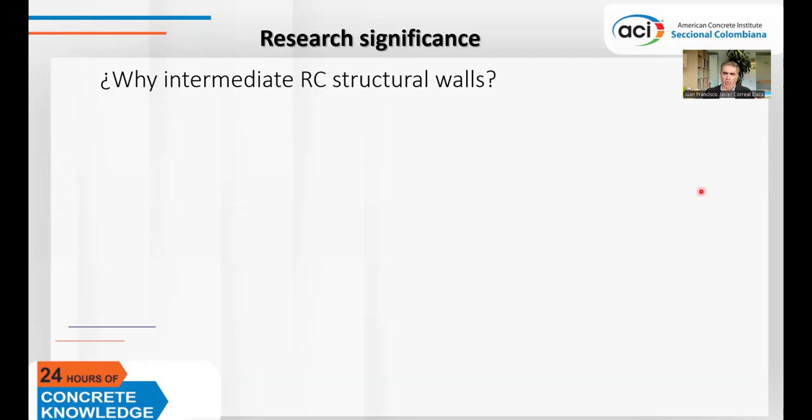We could design using the special reinforced concrete specifications for this kind of system in intermediate seismic hazard zones. But based on a study by Professor Luis Enrique Garcia in 1995, it would increase the cost of the building by close to 20%.

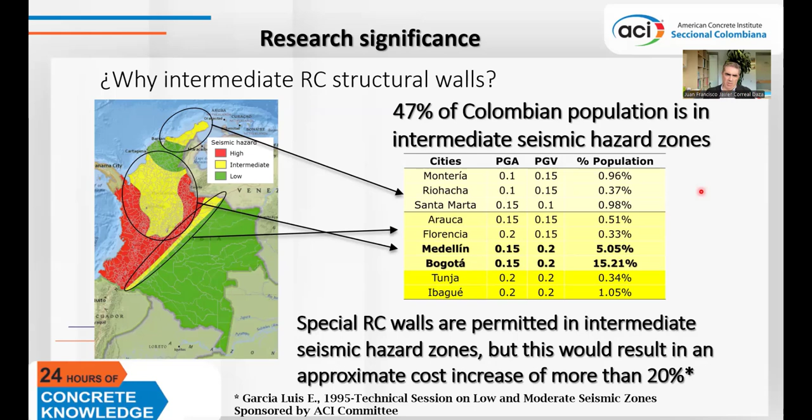In addition, based on national statistics, this kind of wall system has been used very often and successfully in Colombia. Actually, based on statistics from last year, 2023, 50% of residential buildings have been built with this kind of system.

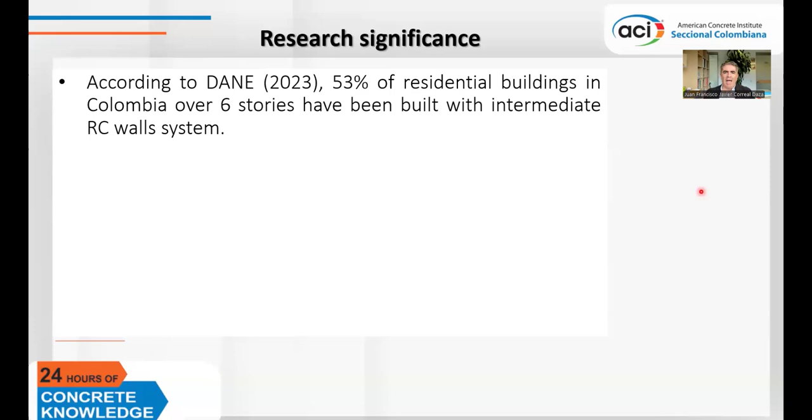We have our Colombian code that has specifications for this kind of intermediate structural wall, and it's probably the only design code in the world that has this kind of specification. We have been using these specifications for probably the last 20 years.

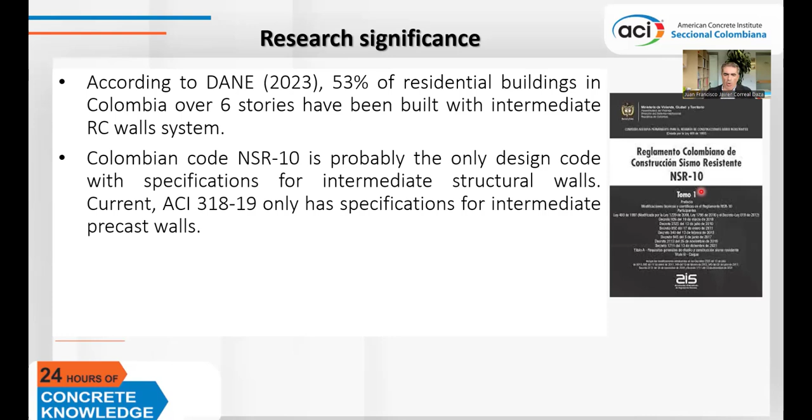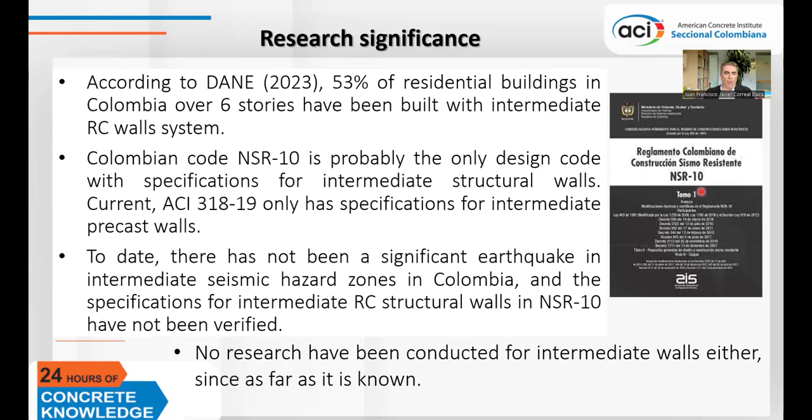The ACI 318 actually only has specifications for intermediate precast walls. To date, there has not been a significant earthquake in an intermediate hazard zone in Colombia, and the specifications for intermediate reinforced structural walls based on the Colombian code have not been verified or tested. No research has been conducted for intermediate walls either.

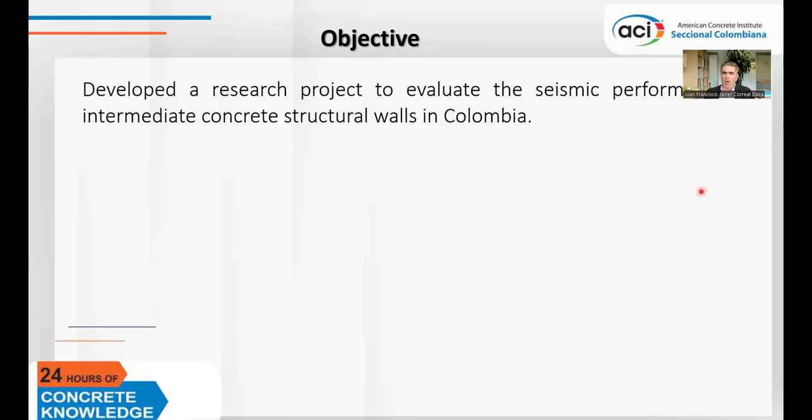Therefore, we decided to do a research project with the objective of evaluating the seismic performance of intermediate concrete structural walls. To do that, Universidad de los Andes joined efforts with an association of all the main construction companies, and also made an agreement with a very important structural company in Colombia, P&D, that was in charge of designing all the archetype buildings I'm going to show you later.

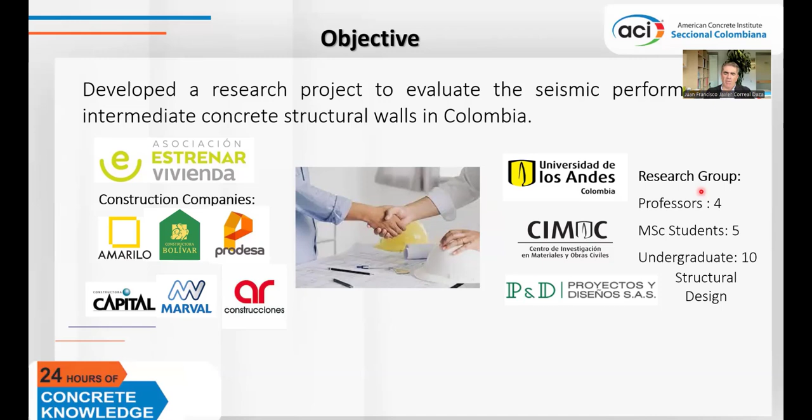The whole project took us about 3 years, which involved full-scale testing of walls and the application of FEMA P695. Why did we use FEMA P695? Because the methodology provides a rational basis for determining building system performance factors. If applied properly, it results in equivalent safety against collapse in an earthquake, comparable to the inherent safety against collapse intended by current seismic codes.

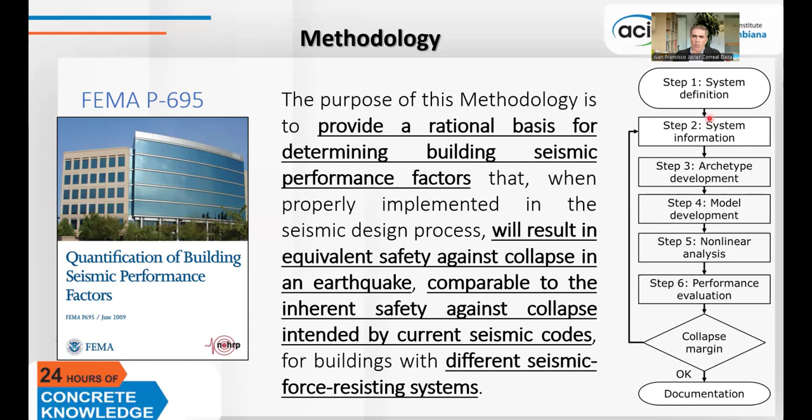This methodology allows the use of different seismic force resisting systems, such as what we have in Colombia with intermediate reinforced concrete walls. The methodology has 6 steps that I'm going to show you through this presentation, applied to our study. The first step is to define the system. Of course, the system is already defined by the Colombian code, which has intermediate structural wall specifications based on the special structural walls of ACI 318 2008.

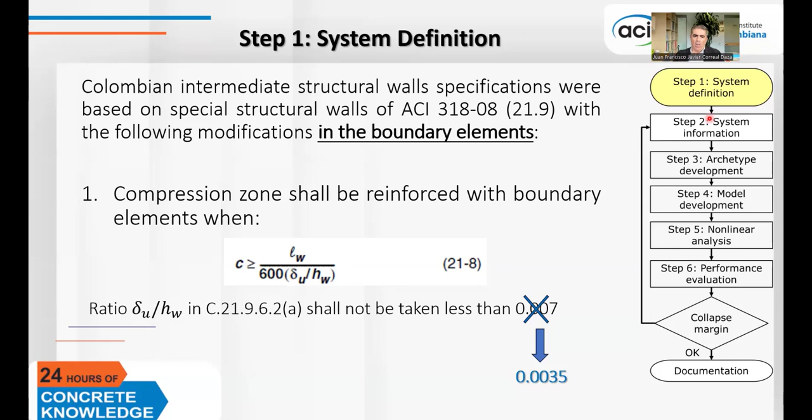But there are some modifications, especially in the boundary elements. The first modification was related to the compression zone that should be reinforced with boundary elements when C, the equation C, is higher than the equation shown. That equation has a ratio that should not be taken less than 0.007. In order to comply with the intermediate seismic hazard zone, we lowered the ratio to 0.0035.

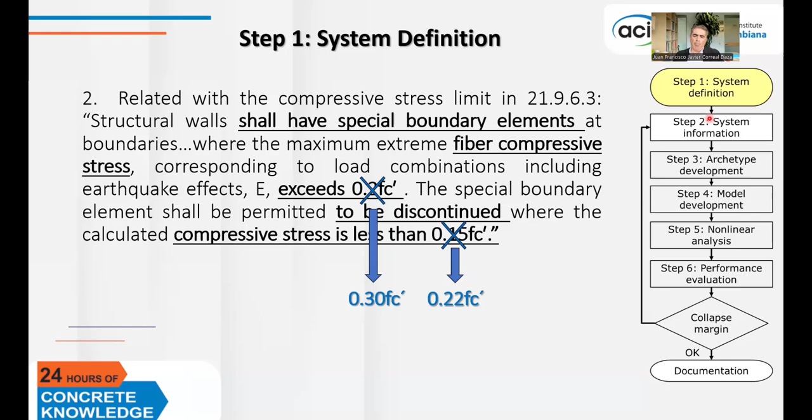The second change in our Colombian code was related to the compressive stress limit. The specifications say you have to use special boundary elements when the compression stress exceeds 0.2 f prime sub c. The specifications also tell you when you can discontinue the special boundary elements, which is when the compression stress is less than 0.15 f prime sub c. In order to comply with the intermediate seismic hazard zone, we increased those stresses to 0.3 f prime sub c and 0.22 f prime sub c.

The third change was related to the transverse reinforcements for boundary elements, which should satisfy spacings for intermediate columns instead of special columns as mentioned in ACI 318. We have a spacing limit that need not be taken less than 100 millimeters. Here I'll show you the spacing that comes from intermediate columns, which should not exceed the smallest of A through D, as you see on the screen.

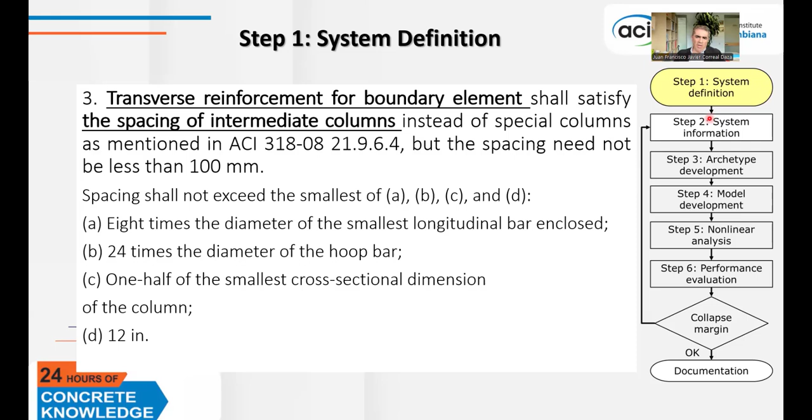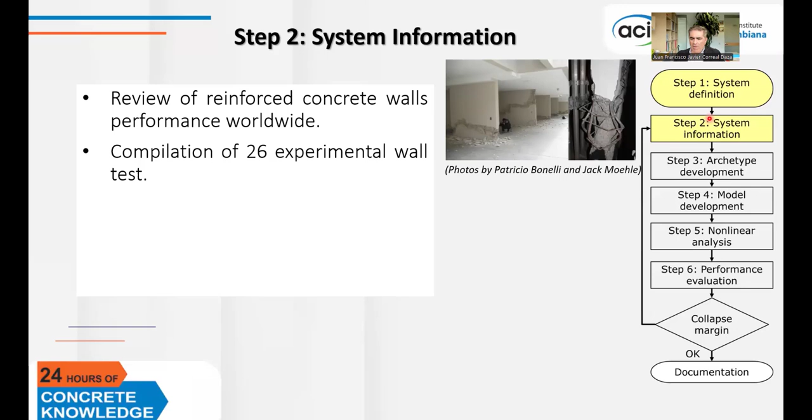In addition to that, we reviewed reinforced concrete wall performance worldwide, mainly the behavior of this kind of system in the Chile earthquake in 2010 and the New Zealand earthquake in 2011. We also did a compilation of 26 experimental wall tests, mainly from reviewing different papers and proceedings, like this one by Professor John Wallace and Jack Moehle.

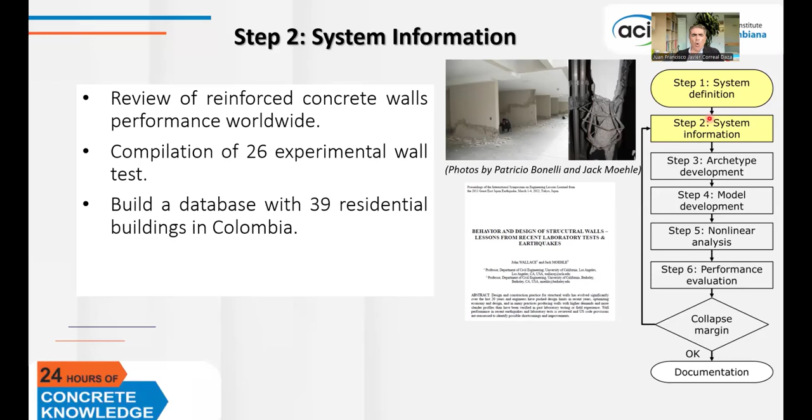We also built a database with 39 residential buildings in Colombia, and we reviewed the most common types of walls, like you see here, the plan view of 2 different buildings. You see different wall configurations, like L-shaped, I-shaped, rectangular or linear walls, and depending on the height of the building, you also end up having boundary elements.

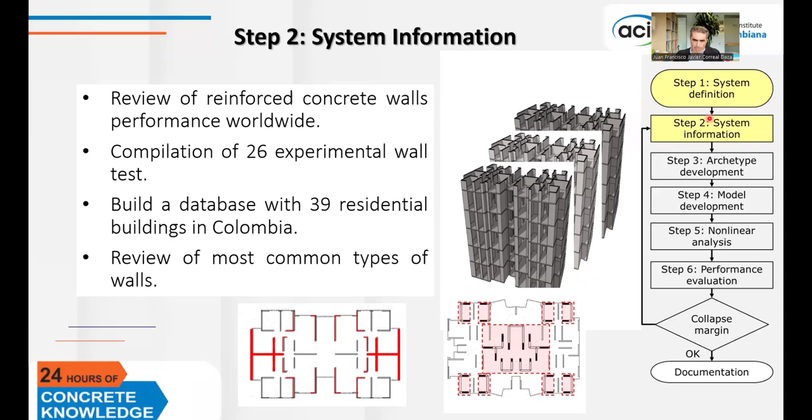Then we go to step number 3 of the methodology, the archetype development. In order to do that, we have a total of 12 archetype types grouped into 4 groups, all structural systems with intermediate structural walls.

The gravity load was defined as low because it varies between 3% and 6% of the wall axial strength. The intermediate level of seismic hazard was divided into 2 levels, minimum and maximum. For the minimum, once we have these loads defined, we can design 3 archetypes for the first group, which were 5-story, 6-story, and 8-story buildings.

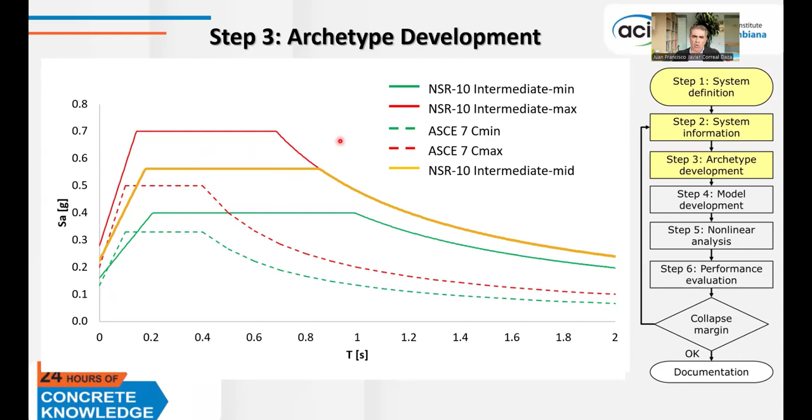In total, 12 archetypes. Just to show you here the design spectrum for the intermediate maximum level, which is the red spectrum, and the green, which corresponds to the intermediate minimum level of hazard. For comparison with ASCE 7, using Seismic Design Category C, which is like the intermediate seismic hazard zone in the US, you see it's in the same range as in Colombia. I also show the intermediate mid-level, which is used to design buildings in Bogota and Medellin, the 2 main cities in Colombia.

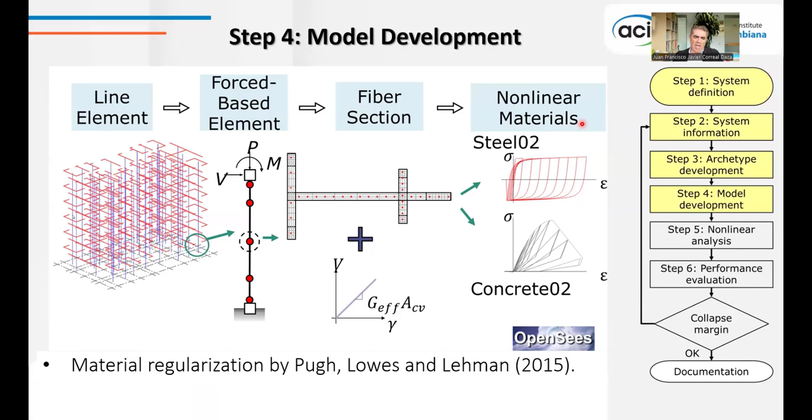Step number 4 was to develop the computer program. We used an OpenSees computer model, with force-based elements and fiber sections with nonlinear materials. We used material regularization recommendations by Pugh, Lowes, and Lehman, and we also used confined concrete models for confined elements like boundary elements by Saatcioglu and Razvi.

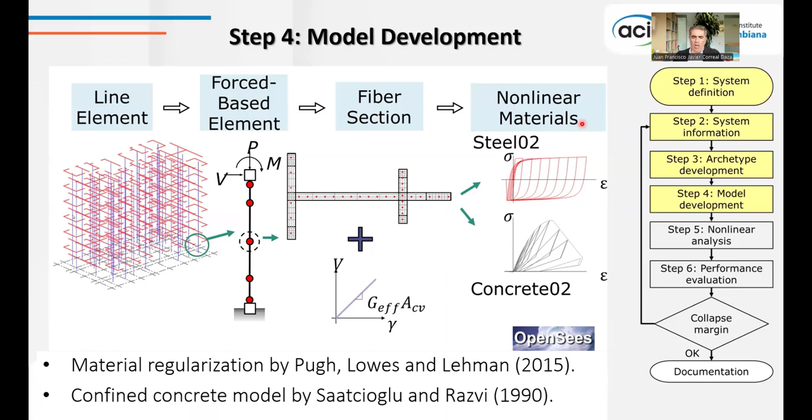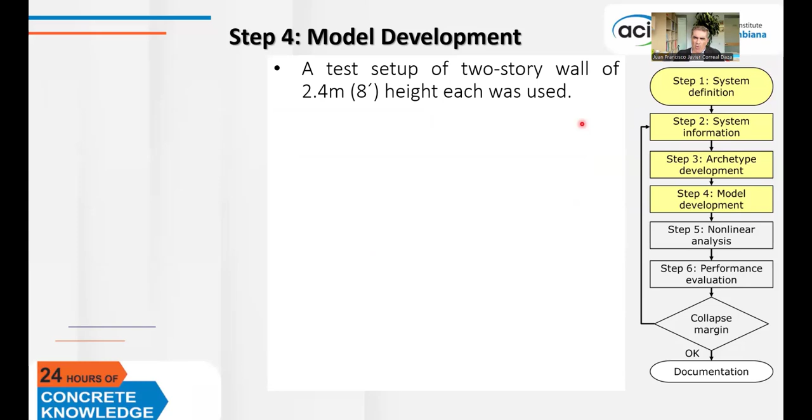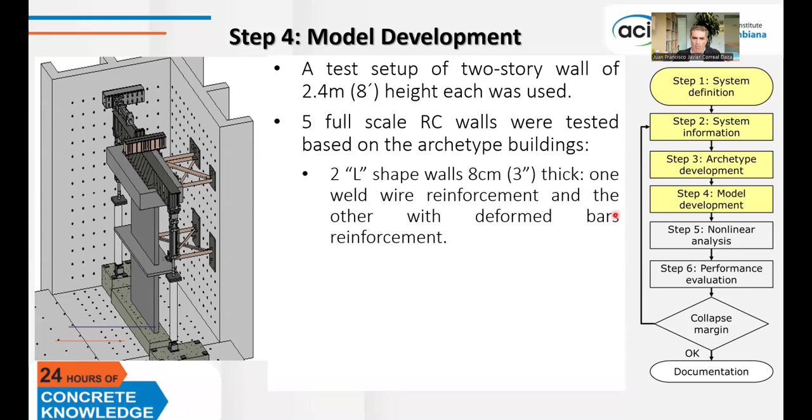The first two were L-shaped walls, 8 centimeters thick, one reinforced with welded wire and the other with deformed bars, but otherwise identical—only the reinforcement type changed. Here are the pictures of the two L-shaped walls with 8 centimeters thickness.

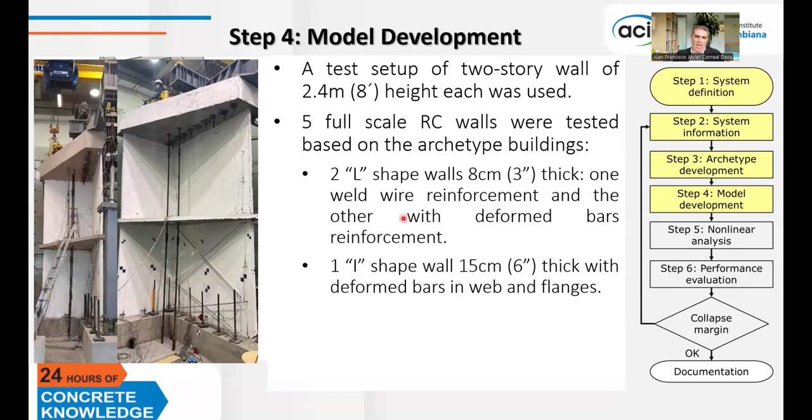The third one was an I-shaped wall, 15 centimeters thick, reinforced with deformed bars in the web and flanges. As you see, there is some extension of the web at the end of the wall, and this is because it's typically found in actual buildings.

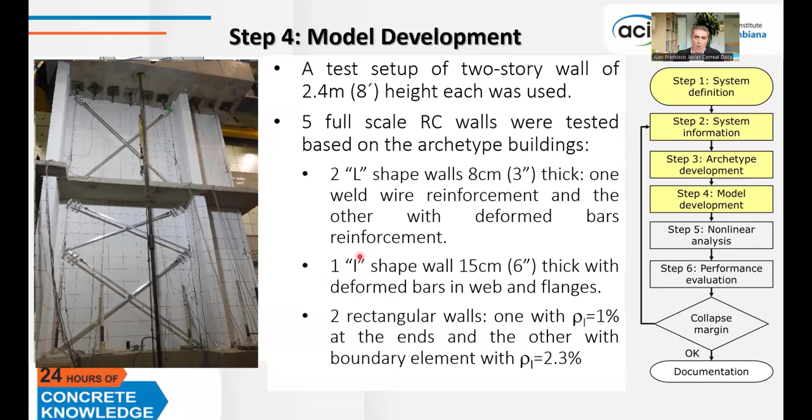The last two walls that were tested were rectangular walls: one with a longitudinal reinforcement ratio of 1% at the ends of the wall, and the other with boundary elements having a longitudinal reinforcement ratio of 2.3%.

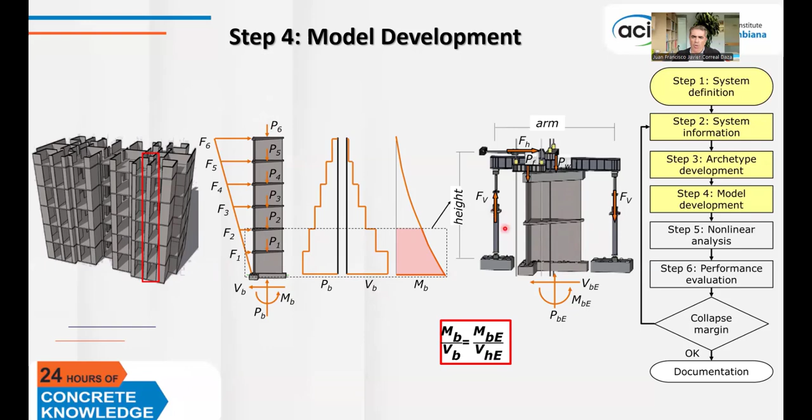Just to explain the setup: the idea is that we want to simulate the real axial force, shear, and moment that a wall will experience at different heights. So we use this setup with two vertical actuators and one horizontal actuator.

This is a video showing the actual load, which depends on the height of the building. The two vertical actuators give part of the moment at the base, the other part comes from the horizontal force times the height, and the shear comes from the horizontal actuator. In that way we have the real forces at the bottom of the wall.

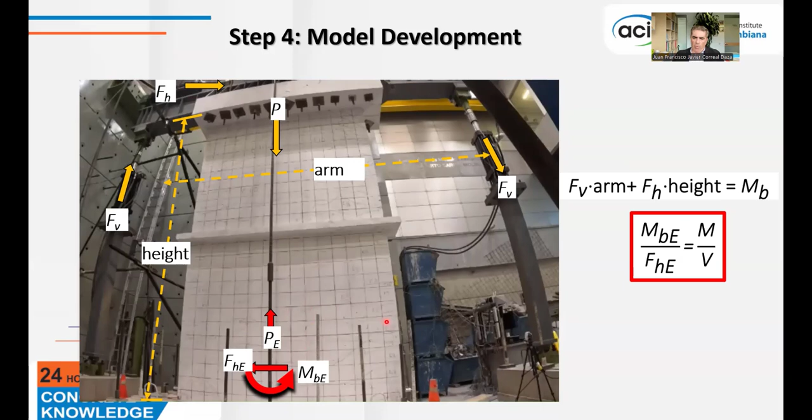Here are the experimental results compared with the computer simulation. As you can see, there is very good agreement, not only for L-shaped walls, but also for I-shaped walls, as well as rectangular walls with boundary elements.

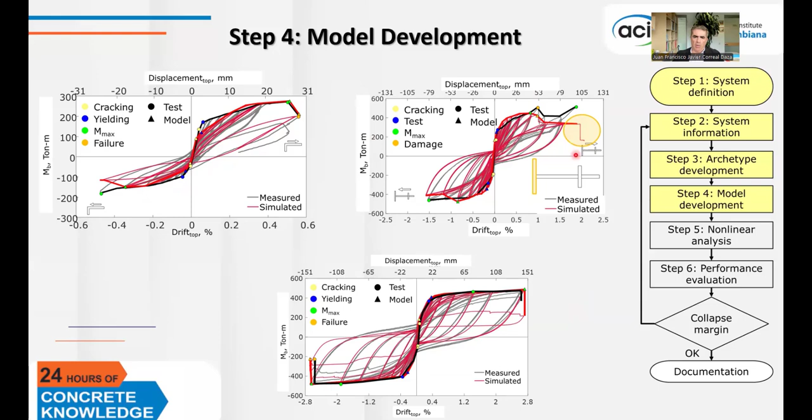Something very important for the model is that it needs to be able to predict the failure of the walls. This is important, and it's something the FEMA P695 methodology requires, which performs fragility analysis.

In order to do that, we have some building model assumptions. One is that we use a modal damping of 3% based on ASCE 41. We also assume a rigid diaphragm, and we calculate and include the torsional stiffness of the wall sections in the whole building.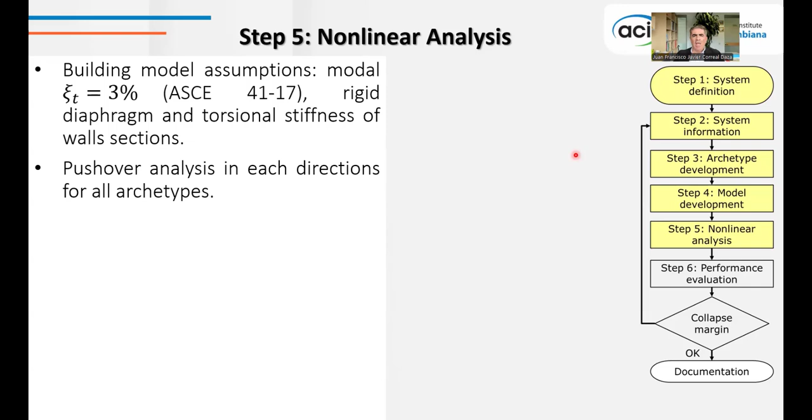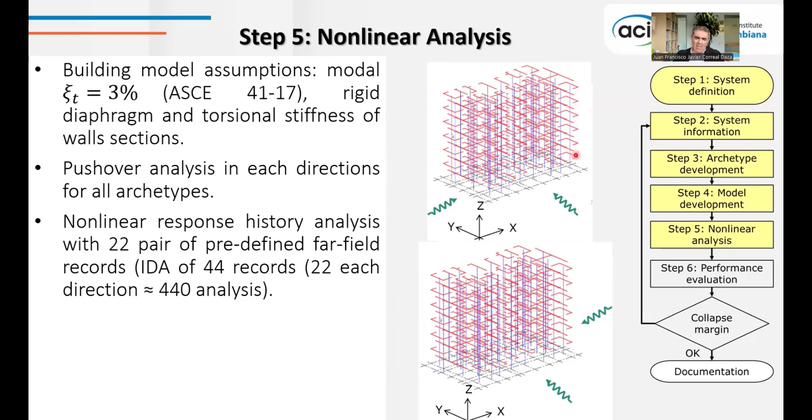Then we perform a nonlinear response history analysis with 22 pairs of predefined far-field records, as the methodology requires. In other words, we perform an incremental dynamic analysis of 44 records, applying 22 in each direction, giving around 440 analyses per archetype.

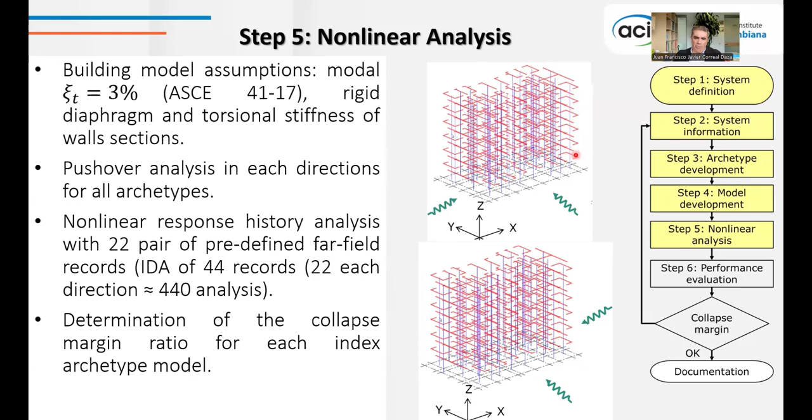We then calculate the MCE intensities from the design spectrum we use. Taking the median collapse intensity divided by the MCE intensity gives the collapse margin ratio based on the methodology. It is then possible to make adjustments depending on whether a 3D analysis is used.

That was our case. It is also necessary to make an adjustment of the collapse margin ratio for ductility as well.

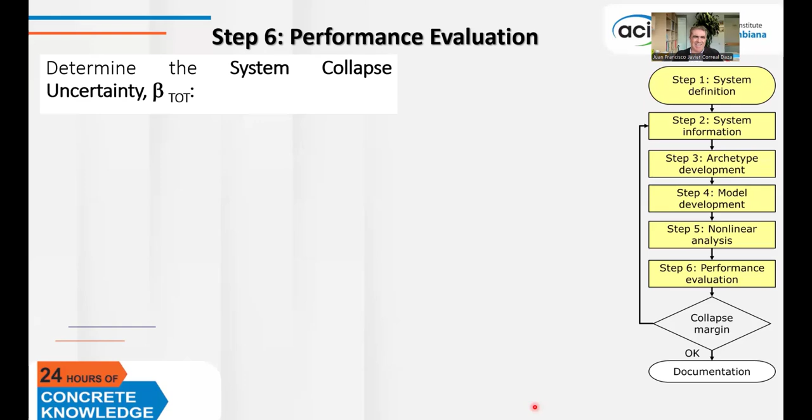Then for step number 6, the performance evaluation, it is important to determine the system collapse uncertainty, beta total, which is based on an equation with four different betas.

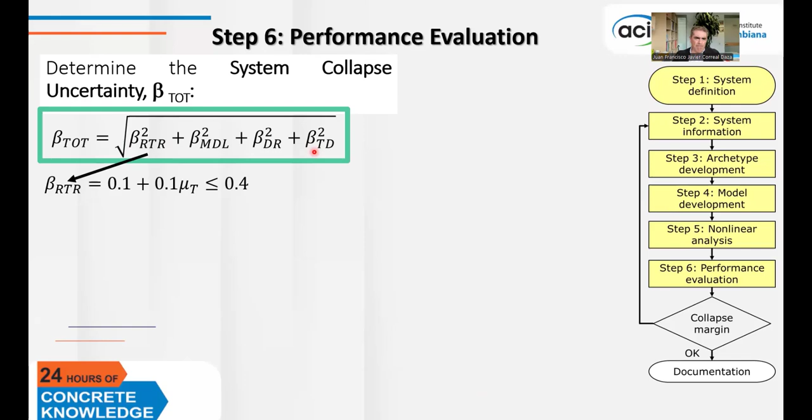The first beta relates to the ductility capacity. The other three betas relate to different things. The first is based on table 5.3 in FEMA, related to the quality rating index of the archetype models, which must be qualified. We rated it as medium based on the accuracy and representation of the collapse characteristics, giving us a 'fair' beta.

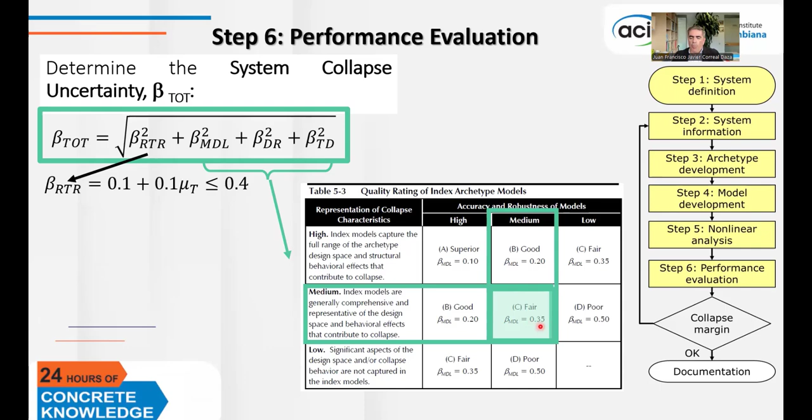Close to 0.35. We then do the same procedure with table 3.2, the uncertainty related to experimental investigation. There we rated high for confidence in the test and medium for completeness, giving us a beta of 'good'.

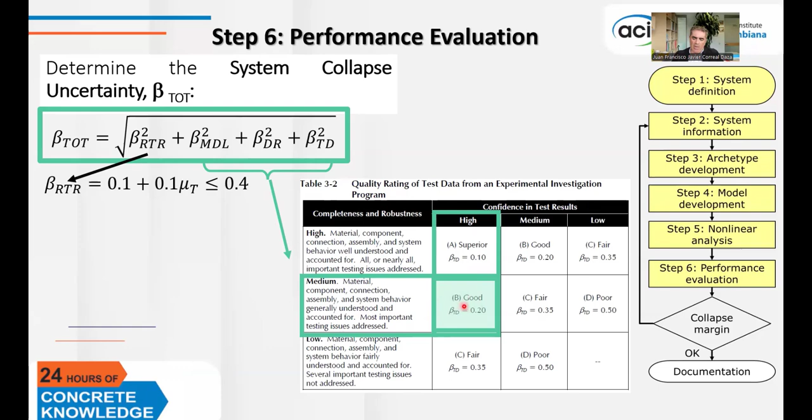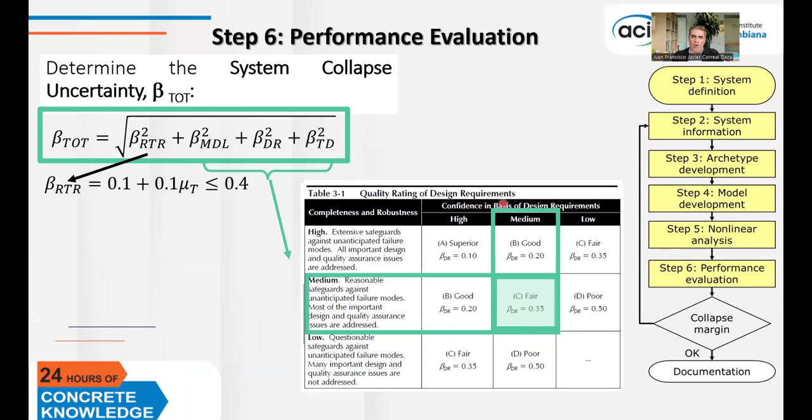We did the same with the design requirements, getting a beta of 0.35 based on the qualification of confidence and completeness of the design requirements.

Once we have beta total, we go to table 7-3 and compute the acceptable value of the adjusted collapse margin ratio for a collapse probability of 10% and 20%. The 20% value here is used to compare with the margin ratio calculated from every archetype.

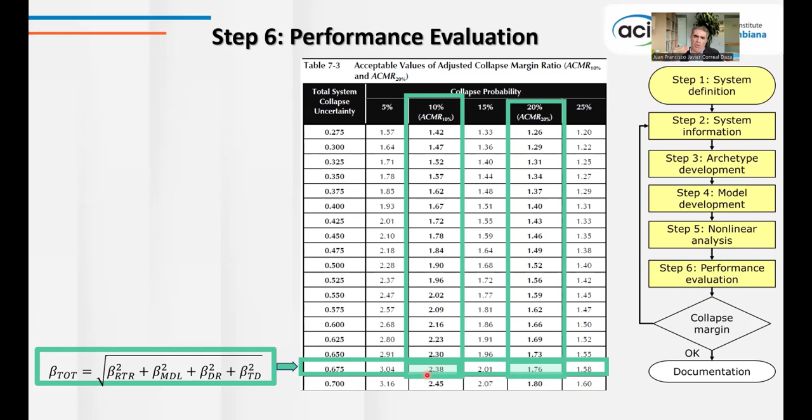And the 10% collapse acceptable adjusted collapse ratio is used for the average of each performance group. Here is a table that summarizes all the results. I'm just going to explain the first three.

The first 3, as you see, is the group number 1. And here are the ACMR values that we calculate from our nonlinear analysis, and this comes from the tables that I showed you. So as long as this number is more than this one, it passed. So in all the groups, here is the average just to compare the group.

Okay, so as you see, in all the cases, it passed. So this is the way that we prove that the intermediate structural walls specification in Colombia are compliant with this methodology, which is a safety issue that we are proving here.

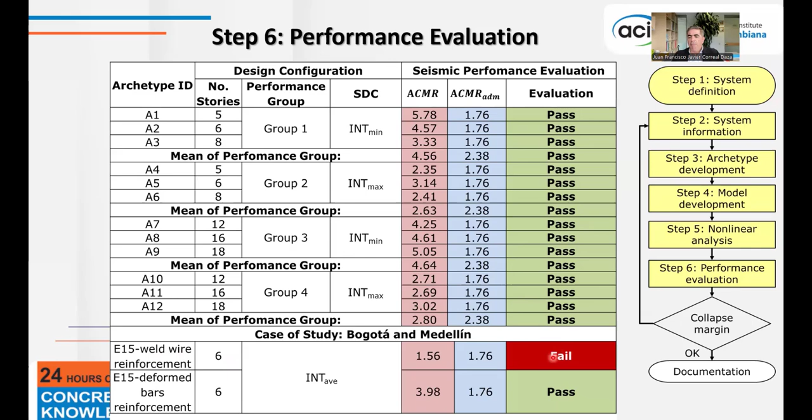Also, we did a case study in Bogota and Medellin with 2 different buildings that have 6 stories each, but they are different. One is reinforced with weld wire and the other is with deformed bars. As you see, when we have weld wire, the wall reinforcements with weld wire, they fail the FEMA P695.

As conclusions, based on the limitations of this study, the following are established for intermediate structural walls based on the Colombian seismic code. The first one is the selected archetypes designed for the minimum and maximum levels of Colombian intermediate seismic hazard zone, with the design criteria based on the Colombian seismic code, meet the requirements of FEMA P695.

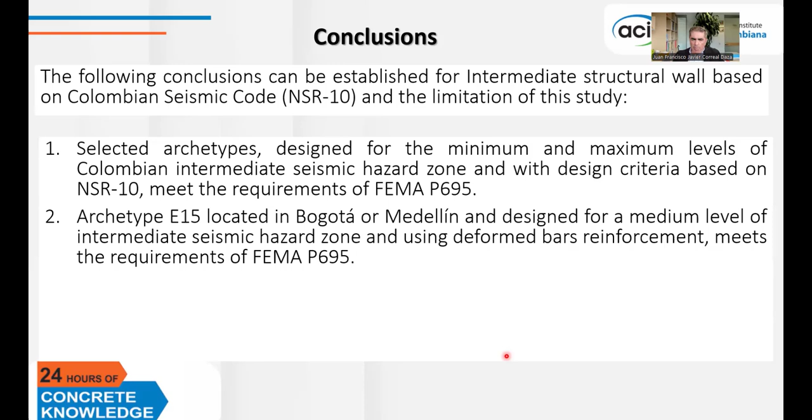As you see in the table, the archetype located in Bogota and designed for a medium level of intermediate seismic hazard zone and using deformed bars meets the requirements of FEMA P695. Now, if we take exactly the same building but change the reinforcement of the walls by using weld wire, it does not meet the requirements of FEMA P695.

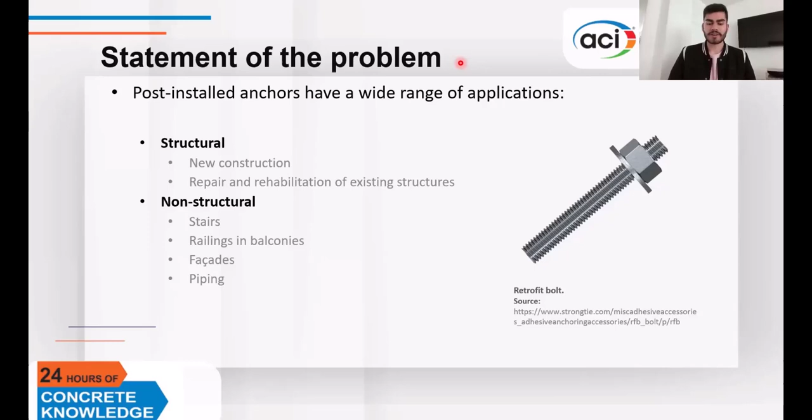So, what was the problem we wanted to address? Well, post-installed anchor connections have a wide range of structural and non-structural applications. Wherever you look, you may find something anchored to concrete. Now, these anchors may be subjected to different types of loading. However, we wanted to address those affected by shear loading.

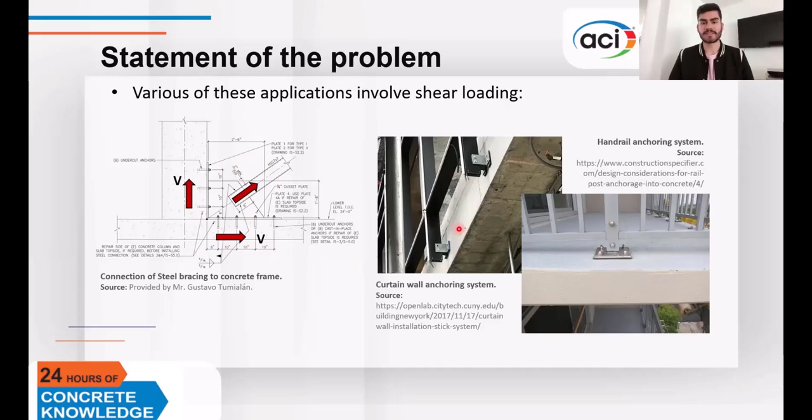Some examples may include steel bracing connections to concrete frames, as well as the anchoring of facades and railings in balconies. Now, it may be somewhat intuitive, but the capacity of shear-loaded anchors is highly dependent on the distance between the anchoring system and the edge of the concrete member.

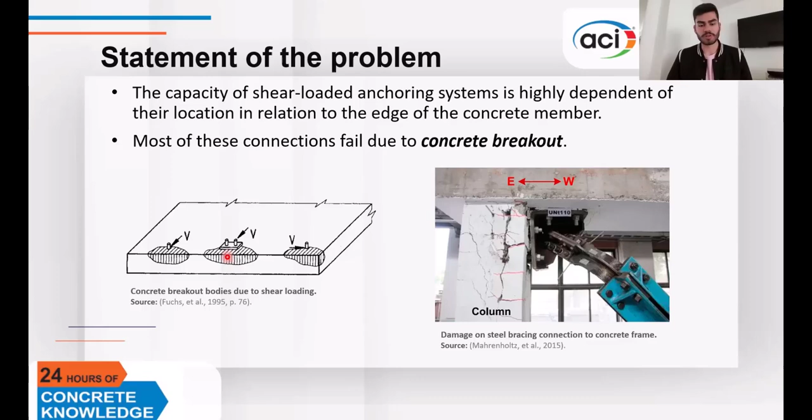Typically, failure occurs when the shear load generates such a displacement of the anchor that it induces a tensile stress within the concrete that exceeds its capacity, leading to cracking and the subsequent formation of a breakout cone. This failure mode is known as concrete breakout.

However, concrete breakout can be controlled. If the use of anchors is planned since the design stages, a cast-in anchor reinforcement may be employed. This reinforcement typically corresponds to steel hairpins, which take the tensile stresses of the concrete, preventing the total formation of the breakout body. Of course, the main advantage of hairpins is an aesthetic one.

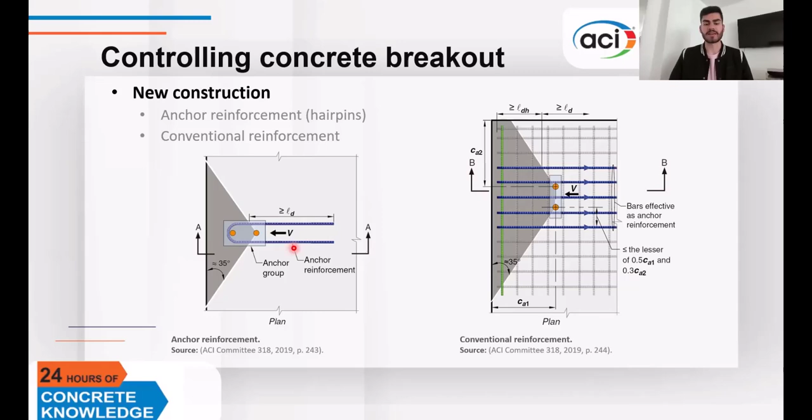However, to use them implies that every single connection subjected to shear has to be considered and detailed since design, and that is very uncommon. So what do we do if we have post-installed anchoring systems? Well, some alternatives may include the reconstruction of the concrete elements or the strengthening of the connection.

On the strengthening side, the use of FRP emerged as a possible alternative. But what are the advantages of FRP? Well, first, it generates no affectation on the internal concrete structure, and second, it may be adjusted to the geometry of the existing structure, which is very important.

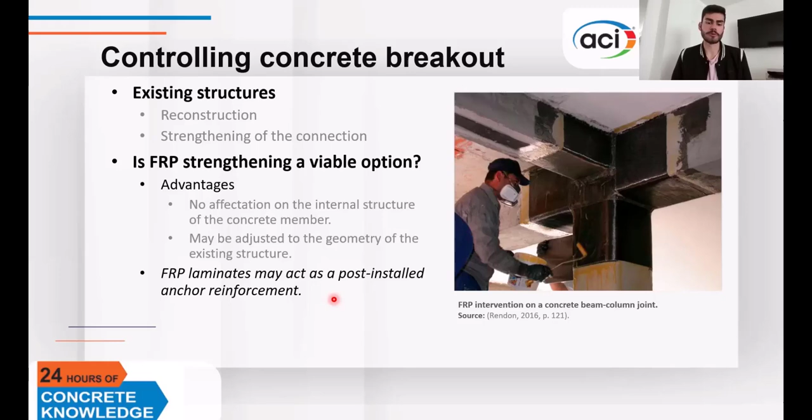So the idea of this study was to use FRP laminates as if they were some kind of post-installed anchor reinforcement, acting as some sort of external hairpin. These were some of the objectives of the investigation.

We wanted to assess the behavior of the reinforced specimens and compare parameters such as maximum load, unit strain, and failure mode. It was also of great interest to compare different geometric configurations of the reinforcement to analyze their failure mechanism. And finally, as this study evaluated a post-installed anchor reinforcement, it was also important to compare the obtained results to those of specimens with cast-in anchor reinforcement, this is, with hairpins.

Now, everything related to anchor design was done according to the guidelines in ACI 318, and everything that involved FRP considered ACI 440. Now, these are the three failure modes of shear-loaded anchors as represented in ACI 318. Concrete breakout on the right is the most common when anchors are close to the edge, as I mentioned before.

On the center, we have concrete pry-out. This one occurs farther from any edge, and it happens due to the eccentricity of the shear load in relation to the geometric center of the anchor, which generates a moment and a basculation movement of the anchor. This failure mechanism also induces tensile stresses, but at the back of the anchor.

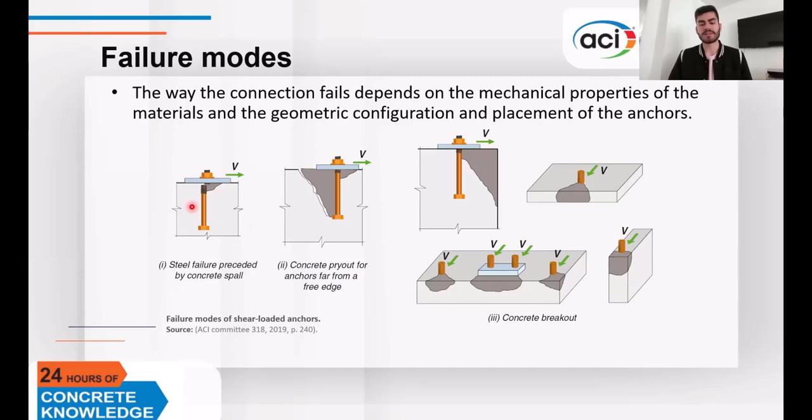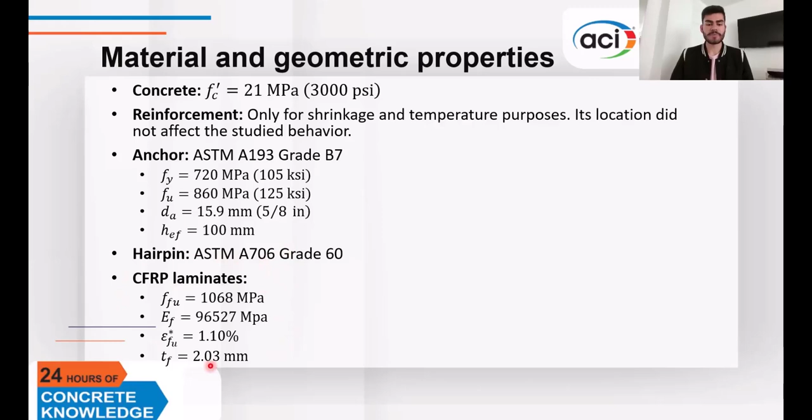These are the material and geometric properties of most of the elements used in this study. We used concrete slabs with a compressive strength of 21 megapascals. The anchors were number 5 ASTM A193 grade B7 threaded rods. Hairpins were constituted by a normal grade 60 bent rebar, and lastly, these were the properties of the CFRP laminates.

Considering the previous parameters, this graph summarizes the behavior of a single anchor, relating its ultimate shear capacity to its distance to the edge of the concrete member. As you can see, as we increase the distance, the capacity also rises. However, from one point onward, the capacity no longer depends on edge distance, but solely on the anchor's material properties. So the red zone corresponds to a concrete breakout controlled failure, and in the blue zone, steel rupture prevails.

For this project, specimens were tested at edge distances of 50 and 100 millimeters, as both are common values in real applications, and because concrete breakout would be their controlling failure mode. However, the results I will show you later focus mainly on the 100 millimeter specimens. Also, given the aim of this study, we wanted to formulate a reinforcement scheme that would always lead to steel rupture, so the connection did not depend on edge distance anymore.

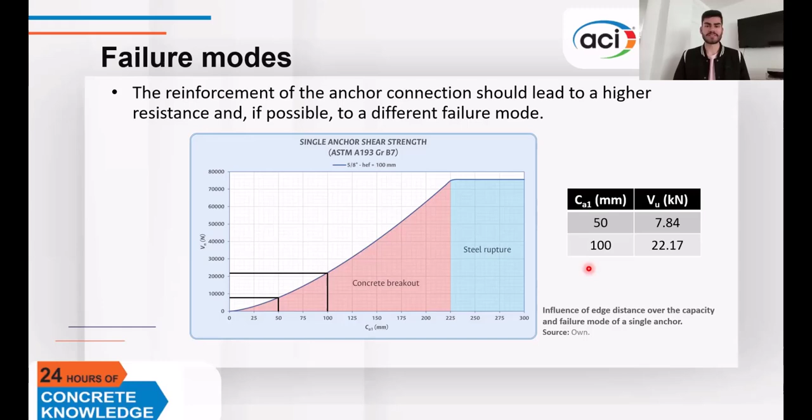The next step consisted in designing the anchor reinforcement. First, it is important to notice that although the type of load is shear, the reinforcement would actually be subjected to tension, as its main function is to take the tensile stresses that generate cracking in the concrete. It is the same principle as for stirrups in concrete beams or concrete columns. As steel rupture occurs theoretically at a load of 75.5 kN, this was the force for which the reinforcements were designed.

However, due to the different configurations, it was necessary to elaborate some strut and tie models to know the tensile force that would be acting on each element. Finally, equating the acting force to the capacity of the reinforcement, it was possible to obtain for the CFRP the required laminate width, and for the hairpins the required rebar area.

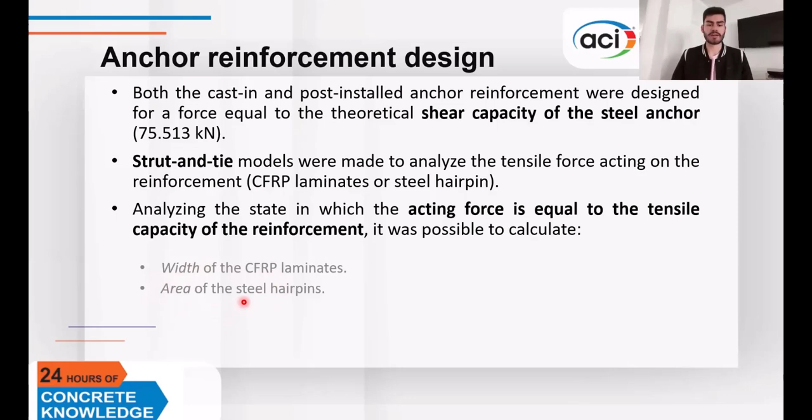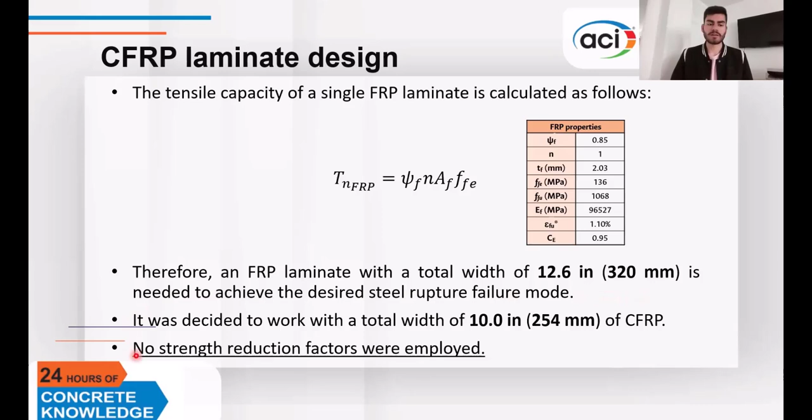Regarding CFRP reinforcement, its capacity due to tensile loads is as follows, which results in a total required width of 12.6 inches or 320 millimeters. However, a decision was taken to reduce this width to just 10 inches or 254 millimeters, to assess if it was possible to obtain the desired results with a smaller area of reinforcement. Also, important to note that no reduction factors were employed.

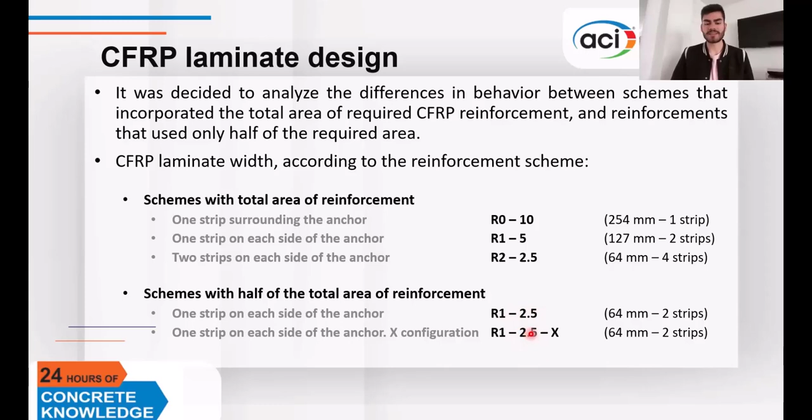Given the required width of 10 inches, various reinforcement configurations were elaborated, varying the number of laminates that would sum up to the total width required. In addition, some specimens were constructed with just half of the required width of reinforcement, which would be 5 inches. Regarding notation, the R refers to a reinforced specimen followed by a number, which signifies the number of CFRP laminates placed on each side of the anchor, and followed by another number, which defines the width of each laminate in inches. In this slide, it is easier to assimilate the different FRP configurations.

The X configuration is important, as in this scheme the laminates are oriented so their axis is perpendicular to the concrete breakout crack path, which would theoretically lead to a better performance of the reinforcement. That is all regarding CFRP design.

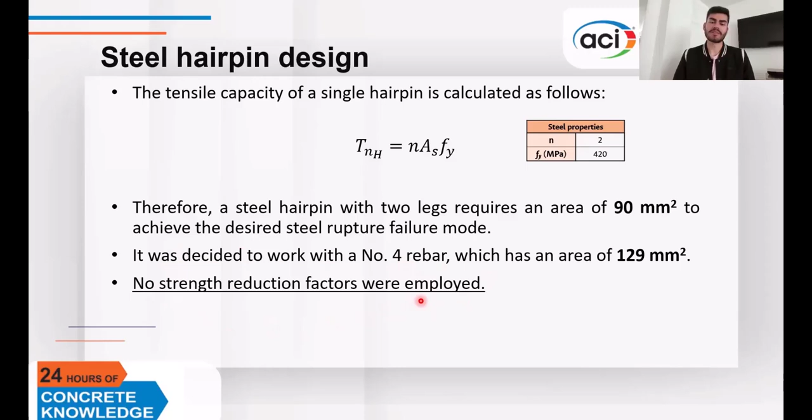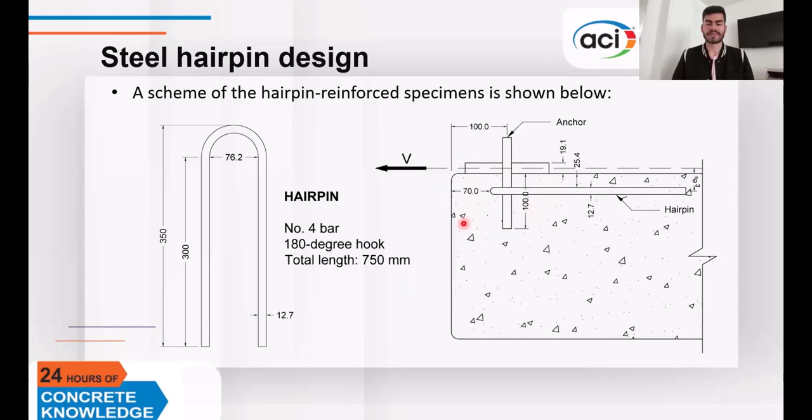On the other hand, the hairpin design was similar to that of a steel member in tension. To obtain anchor rupture, a steel hairpin with two legs would require an area of 90 square millimeters. Therefore, number 4 bent rebar was employed. Likewise, for the hairpin design, no reduction factors were used. This is the scheme that shows the hairpin and its location within the concrete member. As you will see later, the performance of this type of reinforcement is highly dependent on the quality of its installation.

You may see that experimentally, unreinforced specimens failed at a higher load than what is expected according to theory. Recalling that no reduction factors were used, this evidences that ACI 318 equations are conservative in regard to concrete breakout.

In the case of hairpin reinforced specimens, two failure modes were observed: what we could name a pure anchor rupture, and an anchor rupture preceded by concrete breakout. The systems that evidenced the latter failure mode did not manage to achieve a strength similar to that of anchor rupture. This shows uncertainty in the response of cast-in anchor reinforcement, as the cause of this variability is attributed mainly to minor differences in the installation, even if great attention was paid to this process, ensuring contact between the anchor and the hairpin and guaranteeing minimum concrete cover.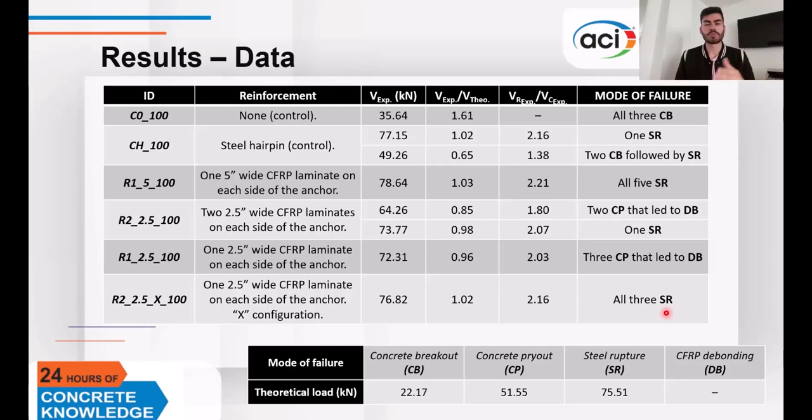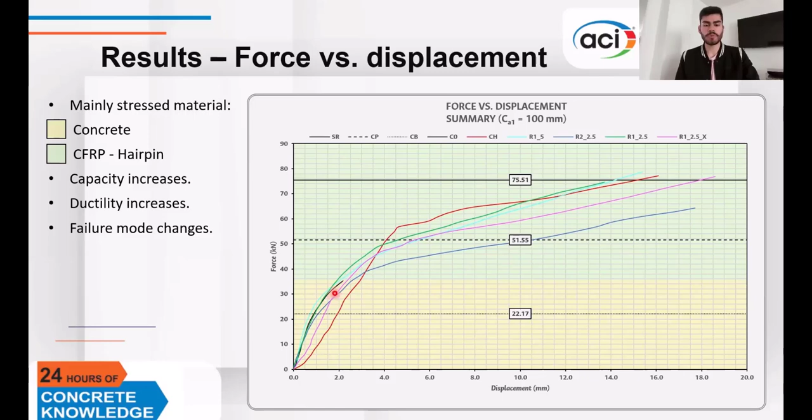This graph summarizes the force versus displacement behavior of most specimens. The black curve represents the unreinforced control specimens. You can see that failure occurs at a higher load than the theoretical one of 22 kilonewton. Then we have reinforced specimens. Clearly, every reinforced specimen surpassed the control capacity, changing the failure mode and achieving a higher ductility as well. You can see the moment the reinforcement starts to work, which is after the initial cracking associated with concrete breakout, and this is evidenced in a change in the slope of the behavior, which is the green zone.

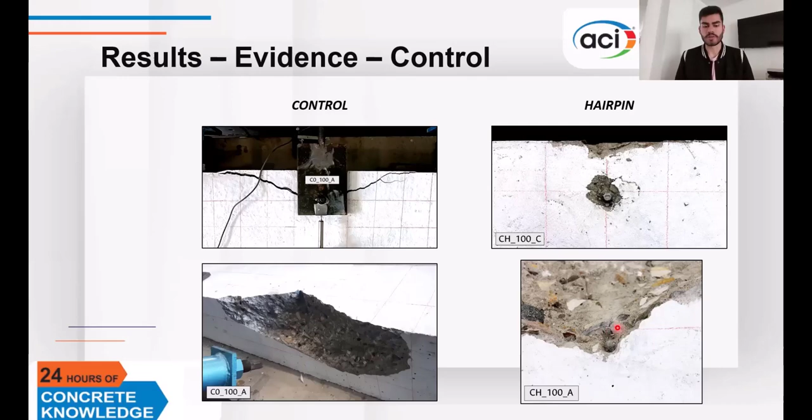Now here are some pictures. On the left you can see the breakout body of the control specimens. On the top right side we have the pure anchor rupture that I mentioned before on the hairpin specimens, and on the bottom right side we have the breakout-then-rupture failure mode, which was observed in all the other hairpin reinforced specimens. These are the total area concentrated in one laminate on each side specimens.

You can see the shear rupture of the anchor and the formation of concrete breakout and concrete pry-out cracks, which did not propagate far from the anchor, as the tensile stresses were effectively taken by the CFRP.

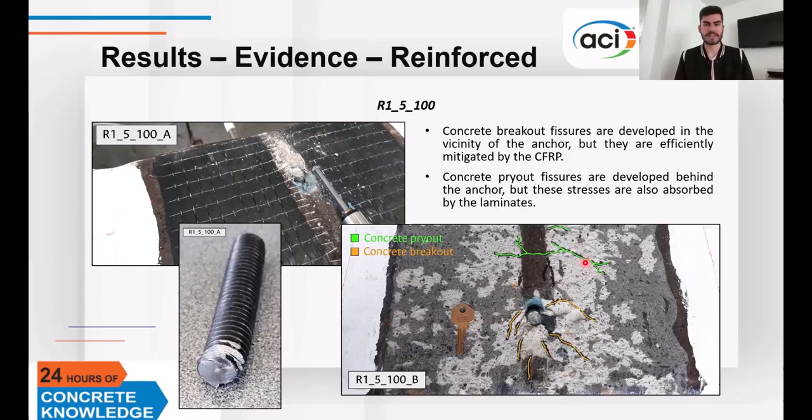This is total area distributed in two laminates on each side. You can see that as the laminate width is smaller, concrete breakout cracks propagated beyond the innermost laminates. This ineffective crack control is what led to the formation of a concrete pry-out body, which caused the debonding of the FRP.

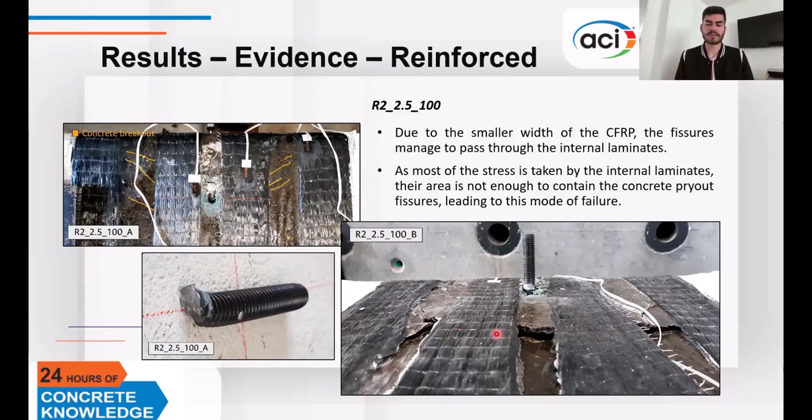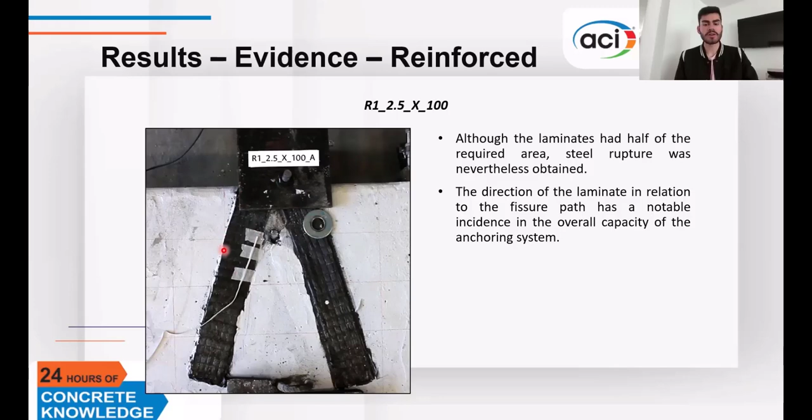And finally, this is half the reinforcement in X configuration. As steel rupture was achieved, we can conclude that the direction of the laminate has a notable incidence on the overall capacity of the system.

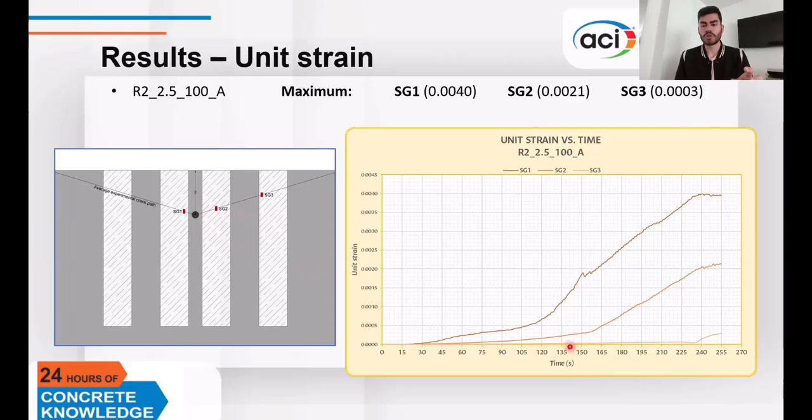Regarding unit strain behavior, strain gauges placed close to the anchor showed higher unit strains on the FRP than those located far from the anchor and the concrete breakout cracks. Here it is possible to observe that distributing the reinforcement into various laminates is ineffective, as these laminates do not show a significant strain.

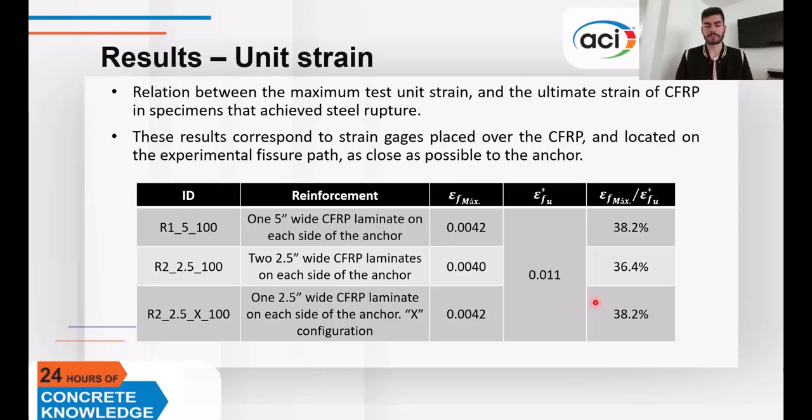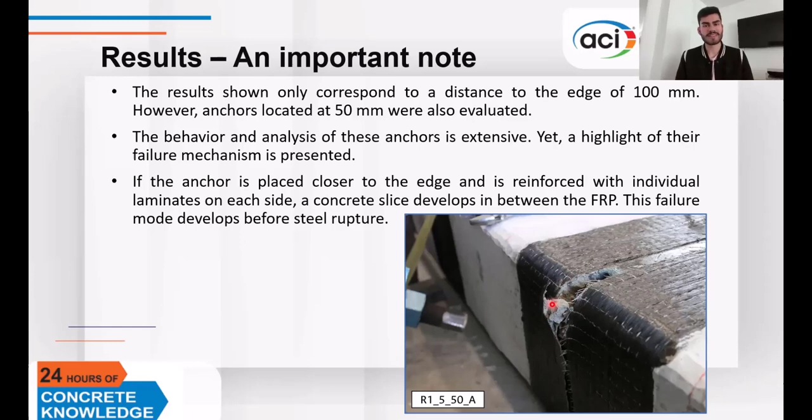Lastly, an important note. The results I previously showed you corresponded to anchors located 100 millimeters from the border. However, for 50 millimeters anchors, some aspects of their behavior were similar and some were different. But what I wanted to tell you is that when the anchor is placed really close to the edge and the reinforcement consists of individual laminates on each side, then a concrete slice forms between the FRP sheets. This failure mode limits the capacity of the system, as steel rupture is not achieved.

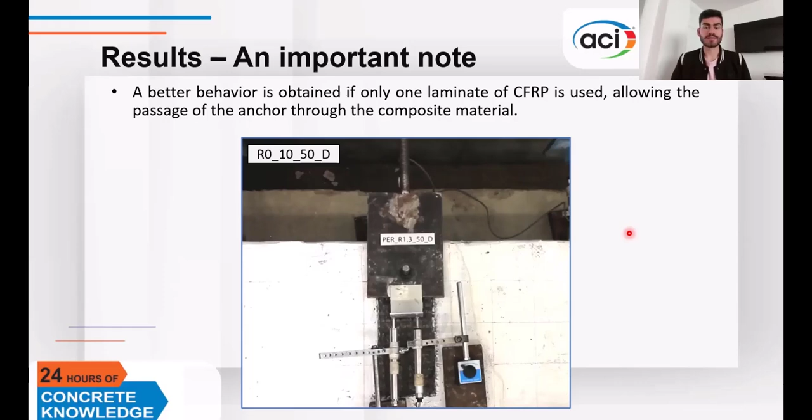Better behavior is obtained if just one laminate is used, allowing the passage of the anchor through the fiber, as we see in the video. In this specimen, we obtained steel rupture.

These are some of the conclusions of this study. The use of CFRP as a post-installed anchor reinforcement does increase the strength and the ductility and changes the failure mode of shear-loaded anchors. To reduce the behavior's variability and to increase the confinement of the concrete, it is recommended to use one single laminate instead of distributing the area of reinforcement on various individual strips.

X-reinforced specimens work really well, but their effectiveness depends on how well the crack orientation is known. If it is possible to reliably predict the angle of the cracks, then X-reinforced specimens are optimal.

Lastly, yes, the response of CFRP reinforced systems depends on the quality of their installation, as it should be done by certified technicians. But the results show that there is higher uncertainty associated with hairpin reinforced specimens, as their response is highly dependent on their installation process.

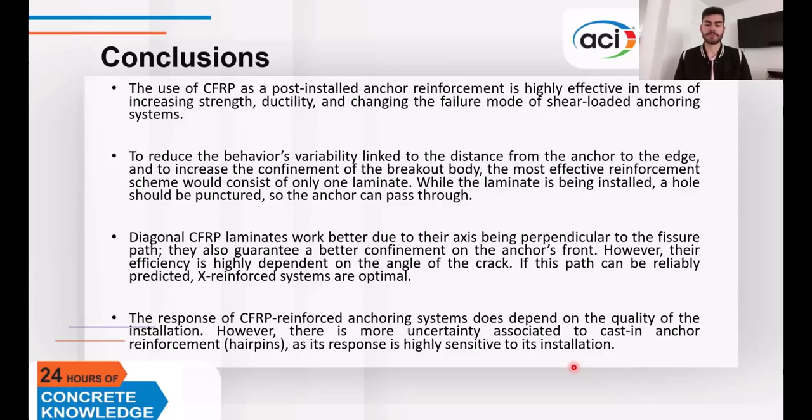Thank you, Kevin, for a great presentation on fibers, and the results are very interesting regarding the distances and the results based on the code and what can actually happen with the fibers. I really don't see any questions, Bernie, but I don't know if you have some from the ACI group.

I have two questions. One is, can FRP strengthening wraps be successfully applied to existing concrete drilled pier foundations near the column anchors located directly below existing floor slabs to strengthen these piers? Does that make sense? Could you repeat it, please? Sure. Can FRP strengthening wraps be successfully applied to existing concrete drilled pier foundations near the column anchors located directly below existing floor slabs to strengthen these piers?

Well, I think we all know that one of the main advantages of FRP is that it can be used in some aggressive environments, as it could be for piers. But as this study showed, I focused mainly on shear loaded anchors. So in this type of application, maybe some tension would also need to be included.